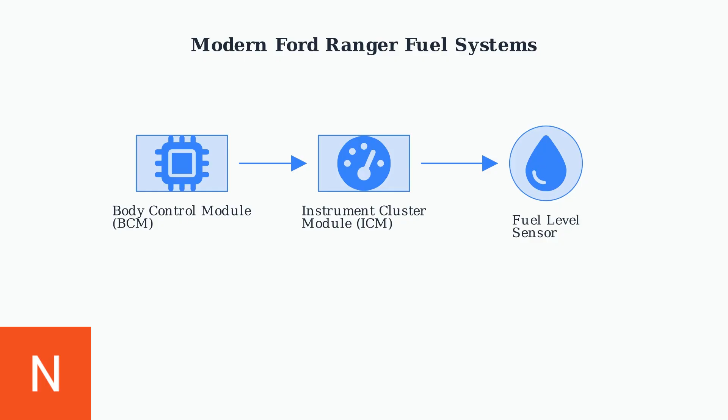Several common issues can cause fuel gauge problems that require a reset procedure. The most common include fuel pump module replacement, battery disconnection or replacement, software glitches after system updates, and sensor drift due to ethanol fuel exposure.

Now let's walk through the basic electronic reset procedure that can resolve most of these issues. Step 1: turn the ignition to the on position without starting the engine. Step 2: press and hold the trip odometer reset button.

Step 3: turn the ignition off while still holding the trip reset button. Step 4: continue holding the button for 10 seconds after turning the ignition off. Step 5: release the button and turn the ignition back to the on position.

The fuel gauge should now perform a self-calibration sweep. Finally, drive the vehicle until the fuel tank is nearly empty, then fill it completely to complete the calibration process.

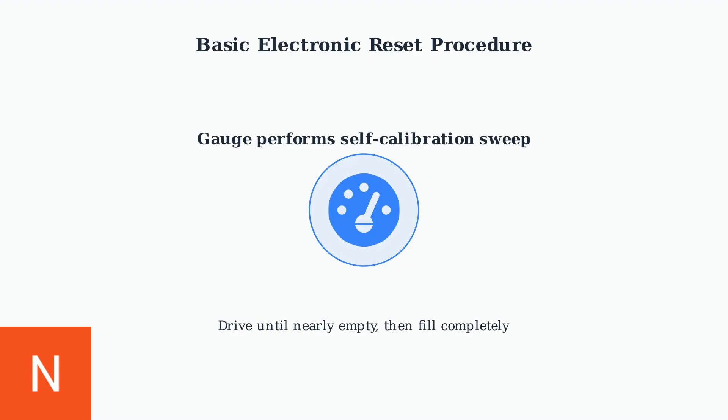This basic reset procedure resolves most fuel gauge issues in modern Ford Rangers. The key is following each step precisely and allowing the system to complete its calibration cycle.

When basic reset methods fail, advanced techniques using diagnostic tools become necessary. We'll explore professional-grade solutions and manual calibration procedures.

The Forscan method requires connecting an OBD2 scanner to your vehicle's diagnostic port. This professional-grade software allows direct access to the body control module for precise fuel sensor calibration.

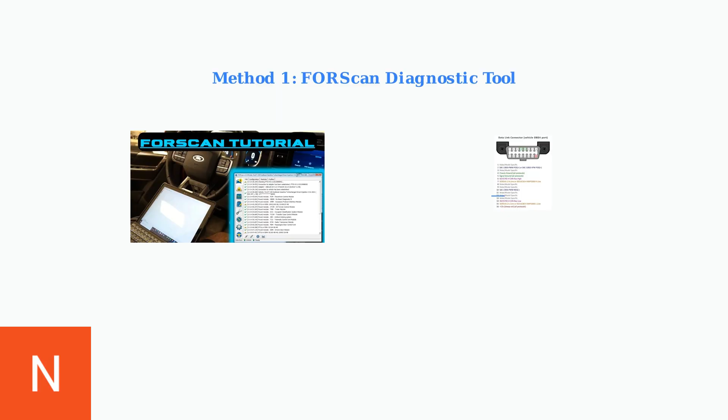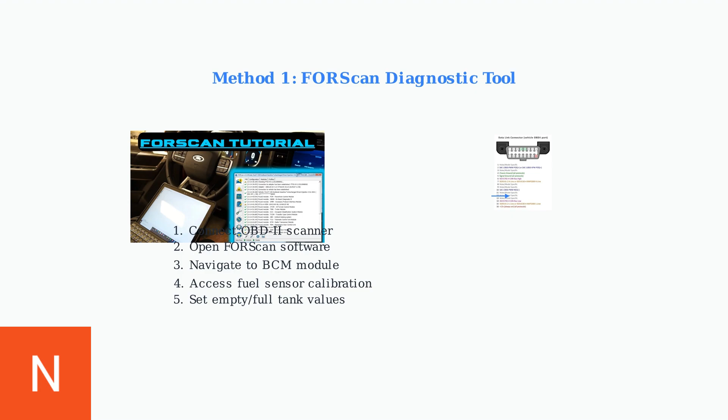Connect your diagnostic tool to the OBD2 port, typically located under the dashboard. The Forscan software will communicate directly with your vehicle's control modules. This method provides the most accurate calibration, but requires specialized equipment and technical knowledge.

The manual calibration method resets the fuel system by clearing stored values and forcing a complete recalibration cycle. This process requires patience, but can resolve persistent gauge issues.

Start with a full tank and disconnect the negative battery terminal for exactly 15 minutes. This clears the system memory and prepares for recalibration.

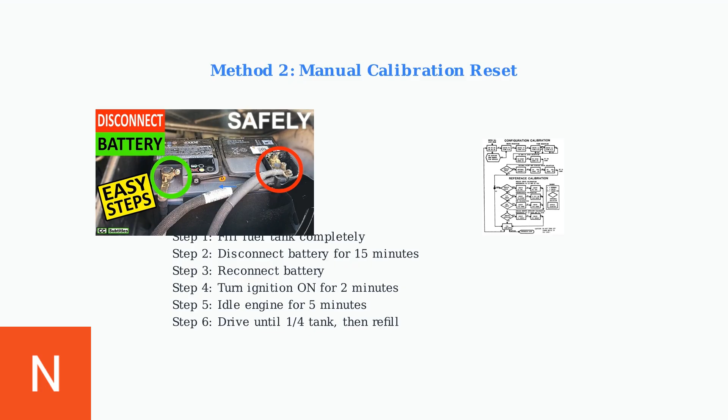After reconnecting the battery, follow the ignition and idle procedures, then complete a full drive cycle from full to quarter tank and back to full for proper calibration. This manual method takes time, but often resolves calibration issues without expensive diagnostic equipment.

Professional help becomes necessary when DIY methods fail or when complex issues are present. Recognizing these warning signs can save time and prevent further damage.

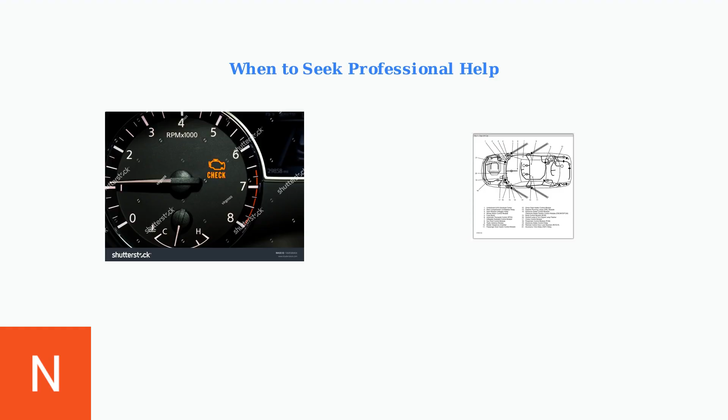A check engine light indicates diagnostic trouble codes that require professional scanning equipment. Multiple failed reset attempts suggest hardware failure rather than calibration issues.

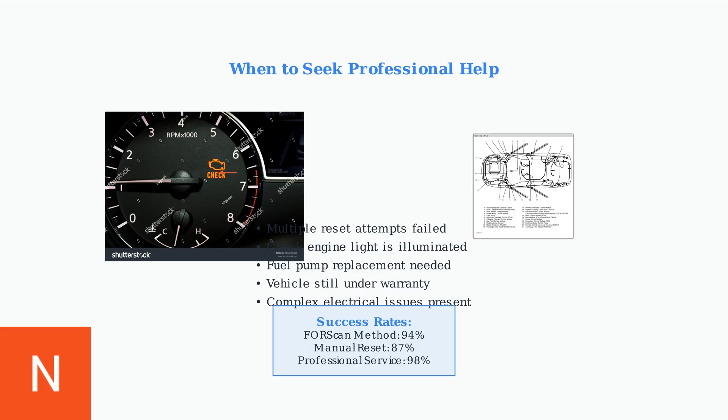Professional service offers the highest success rate at 98%, while DIY methods achieve 87 to 94% success when properly executed. Choose the method that matches your technical comfort level and available tools.